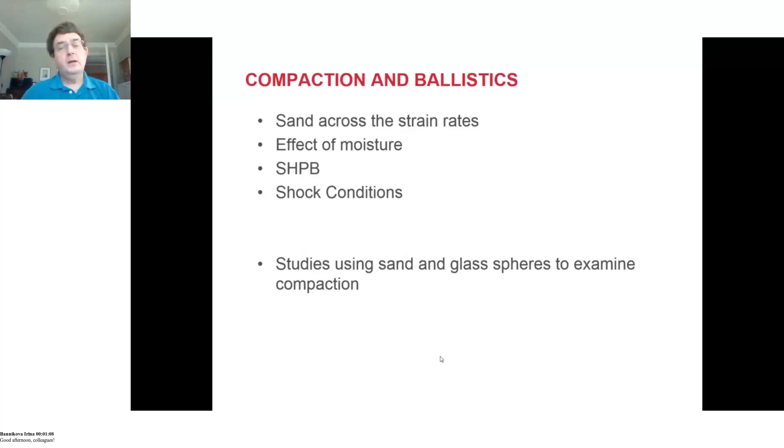So when we look at powders under shock loading, we'll discover there is quite a bit of literature out there. There are various porous models which give us a prediction of what's happening, but often that's when the volume, the voids, have been compacted to an extent that they no longer produce any difference between that and an effectively solid material.

So a lot of the densification processes are ignored, and here we see a graph on the right-hand side, showing an area with question marks in it, indicating some kind of densification occurs that we really don't know about. And then you've got different lines of prediction based upon the initial percentage volume of the solid. So these are kind of models. They've been around for a reasonably long time, and are reasonably well known.

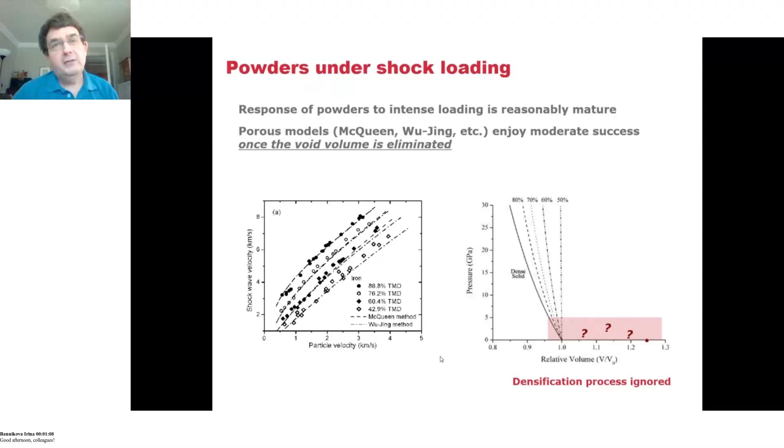Are they predictive? Up to an extent, but they're not really accurate to say a 5% level. If we look at densification at low stresses, we can think of a number of processes occurring. Here we have a little diagram showing on the left-hand side the grey particles, which are material that has not been subject to any stress.

Then when you put on a low stress, you have a kind of rearrangement of the particles. They move relative to one another. They turn - there's rotational energy in the system. Those particles move, rearrange themselves, and end up being slightly more compact. Then you get a region of localized flow where the material is being crushed and moving in, and all the voids are being eliminated - that's the brown region. And then the green region shows a region where fundamentally the material is compacted, and it's just bulk deformation from that point forward.

And those kind of four regions are generally what we would say happens in the granular material. However, what you get is that a lot of the models do not have any mention of what's happening in the microstructure of the material.

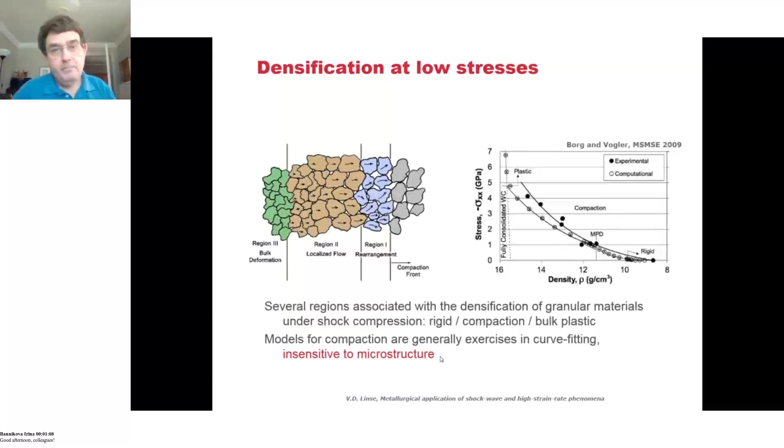You can do plate impact experiments, and this is some work that was presented at the Shock Compression of Condensed Matter meeting in 2011. Various channels were put on there with powders of different initial densities, and an impact was performed on the powders, measuring the particle velocity at the rear of the powder, and from that deriving a shock relationship.

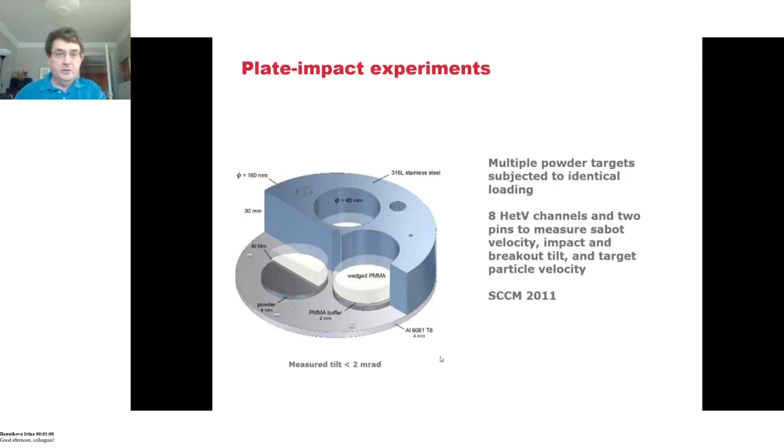One of the key things about a powder is there's significant energy dissipation. You get quite hot material being produced because you've got localized friction between the particles. You have jetting of material within the voids, and energy absorption due to that.

Here we see on the pressure density curve, a compaction process starting at the original density, going through a compaction region up to something close to a hot, fully dense material. Upon release, you follow an isentrope and go down, and there is a lot of residual compaction in the system. That area under the pressure density curve is a measure of the energy deposited into the system. Hence the system can get quite hot.

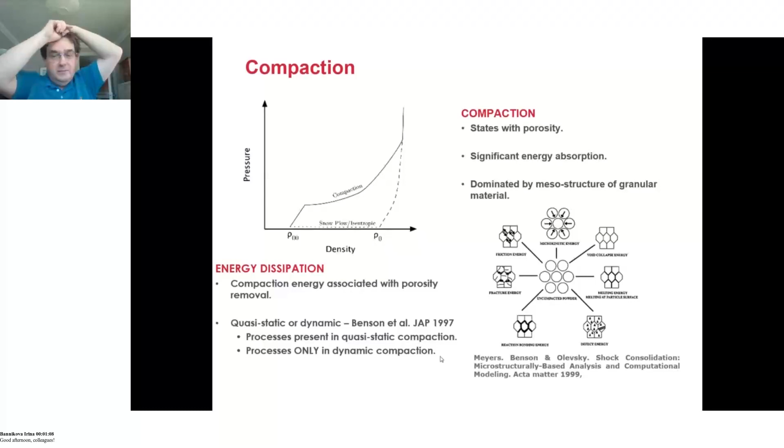Now if you took just sand, with an average particle size of around 150 to 210 microns, picked it up from a beach or similar, and put it into a container under a loading device at very low rates, you will get responses as shown on the left-hand side here.

There's a range of initial densities. That was something we did by just tapping the sand to compact it down under very low loading. So take the sand, tap it on the laboratory bench, then measure the density, and we could get a range of starting densities.

We loaded it quite gently in terms of pressure. There was no particle fracture involved, and we got compaction up to a region of around 1,650 to 1,700 kilograms per meter cubed. You can see the initial densities gradually move together. There's a fair degree of compaction occurring, but ultimately things follow fairly parallel lines, aiming towards some kind of mass density. So that was okay, that was mainly dry sand.

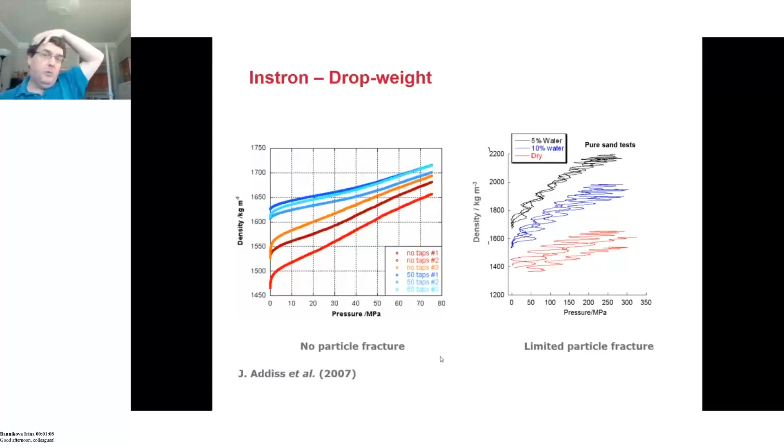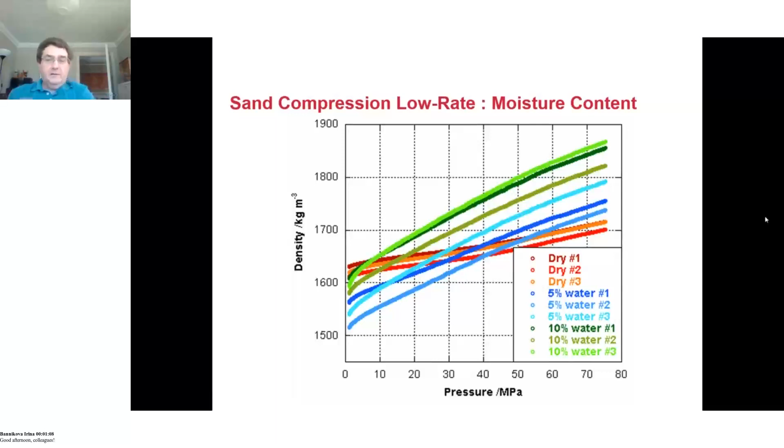Now if you revisited the data for low rates, adding the water, you can get this kind of response. Once you lubricate those crystals by having a little bit of water present, you can get a whole lot more compaction going on, as shown here, where the dry material is the red lines and fairly flat, whereas the moistened material shows significant density increase.

Okay, so far reasonably okay, but can we go to higher rates? Here we did some research funded through QinetiQ, a research organization in the UK, and we did split Hopkinson pressure bars on sand.

Now for sand, it's obviously a porous material. You cannot just put it between two Hopkinson bars because it will fall out of the way. So you put a jacket around the Hopkinson bar sample, around the rods, and you measure the strain in that jacket.

You need this jacket with a strain gauge on it, and you put the sample within that jacket, using a compaction pulse through the Hopkinson bar. You measure the component of stress along the bars, sigma x, using the strain gauges on the bars, and you measure the radial stress, sigma r, using a formula due to Timoshenko to relate the strain on the outside of the jacket compared to the strain on the inside.

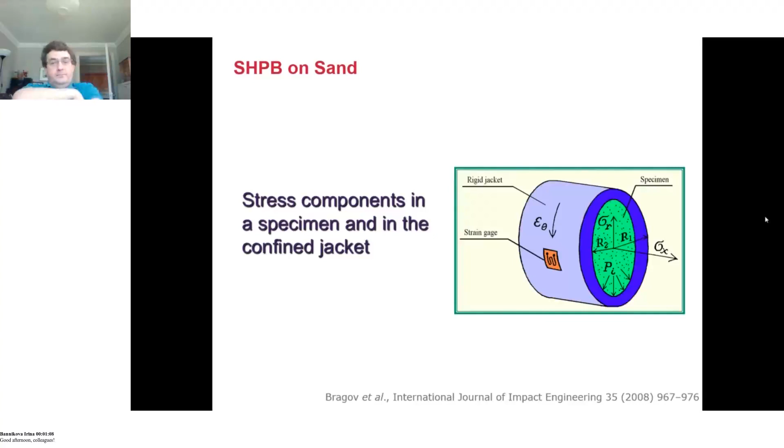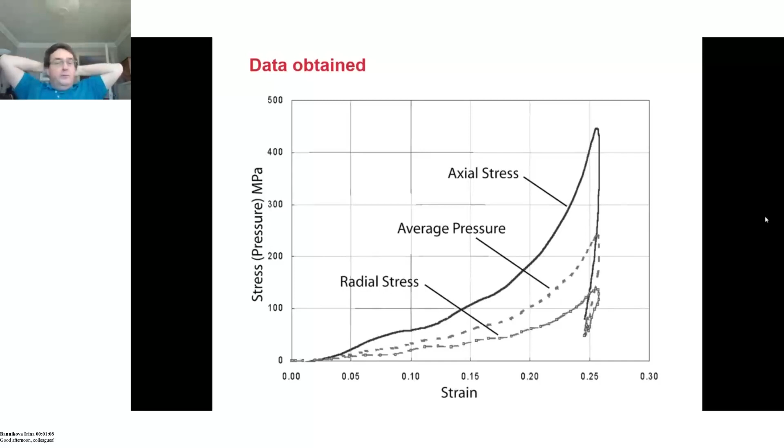This is the kind of data you can obtain from a Hopkinson pressure bar, showing the stress in megapascals. You can see the axial stress, or the stress along the rod, gets up to be quite high, around 500 megapascals. The radial stress follows a very similar behavior, but doesn't go as high, only to about 130 megapascals. If you ask what is the average pressure in the system, you would do a weighted average along the axial stress and the radial stress and come up with the average pressure. This is a response.

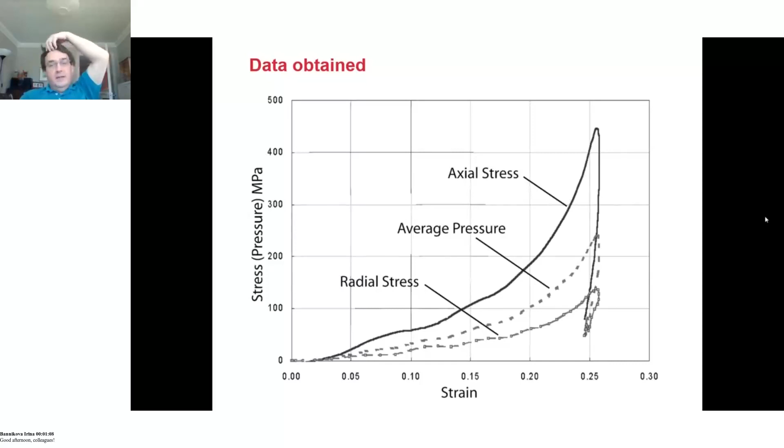You can repeat it with different degrees of water being added, with different particle sizes, etc., and get a series of responses. You can then take your sample arrangement for shock impact. Here we have a system where we have a copper holder with a 3 millimeter thick layer of sand in it, and we're striking it with a plate impactor coming in at up to several hundred meters per second.

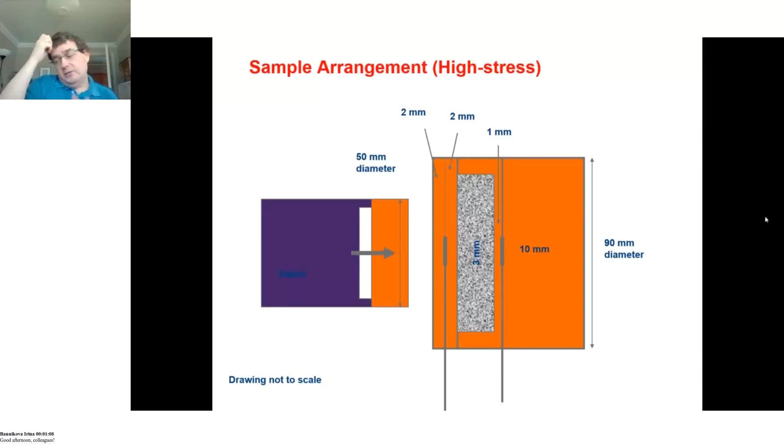It hits the front of the target, and we have manganin stress gauges, which I mentioned in tutorial 2, to record the stress in the direction of impact before the sand layer and after the sand layer. This is the output we got from the rear gauge.

On the front gauge, you measure the input pulse from the copper on copper impact. That's a generally square kind of pulse. You then have a reflection from the sand layer coming back to that gauge, and then you measure what goes through the system. Because we know the dimensions here and they are consistent from experiment to experiment, we can do a calculation based on time of impact - time of stress arriving at the front gauge, time of stress arriving at the rear gauge.

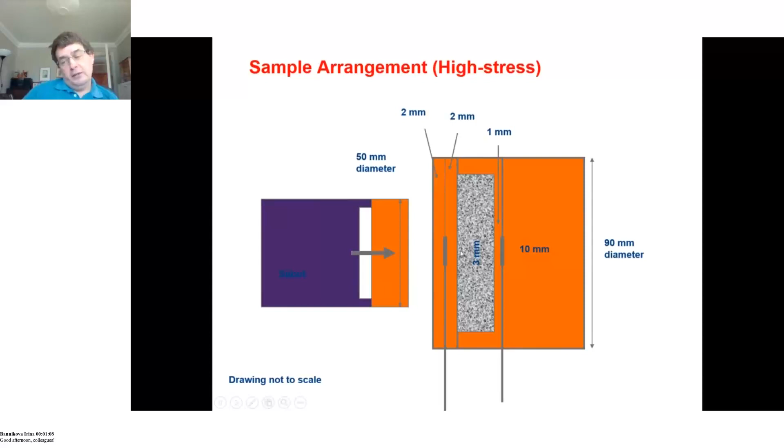This is what you get for different impact velocities, ranging from a couple hundred meters a second up to 900 meters per second, with of the order of 5 experiments. The main thing you'll notice is the time of arrival of that stress pulse varies quite strongly. It's systematic, but there is a very large change, going from around 4 microseconds to kind of 2.2 microseconds. So the transit time through that sand layer has reduced very much over that process.

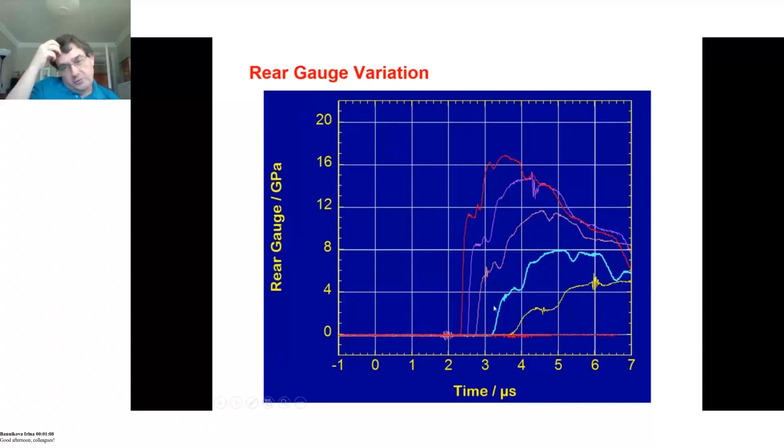The other thing you will notice is there is a step followed by a second ramp, and you will notice some evolution of smaller features on that ramp. I personally think this is due to the time taken for individual grains to fracture. However, there is no definitive conclusion on that.

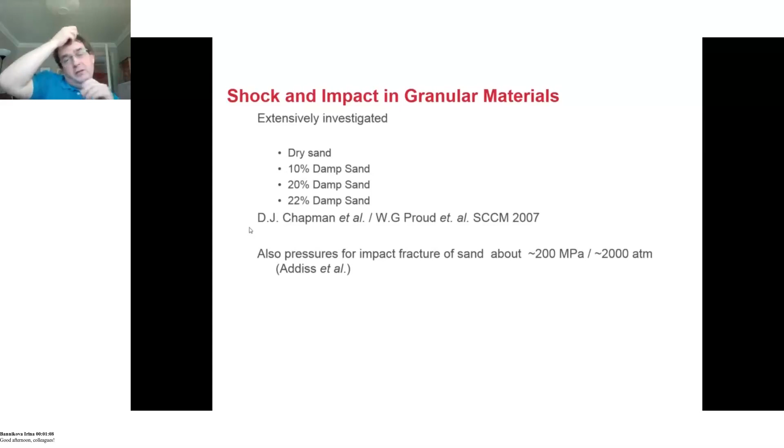Shock and impact in granular materials has been extensively investigated. We reported this at Shock Compression of Condensed Matter for a number of years. We also calculated the pressures for the fracture of sand - individual grains would fracture around about 200 megapascals. But please remember, a grain in the bed can actually rotate and translate as well as fracture, so there are a number of potential processes that can occur.

But then if you added just a little bit extra water, so 22% saturation instead of 20%, you could have a quite marked difference in the shock response. So what this is indicating is that initially, when you replace the voids with water, you have very little effect, but as you get towards filling the majority of the voids, very small variations at that point make a large difference in the shock response of the system.

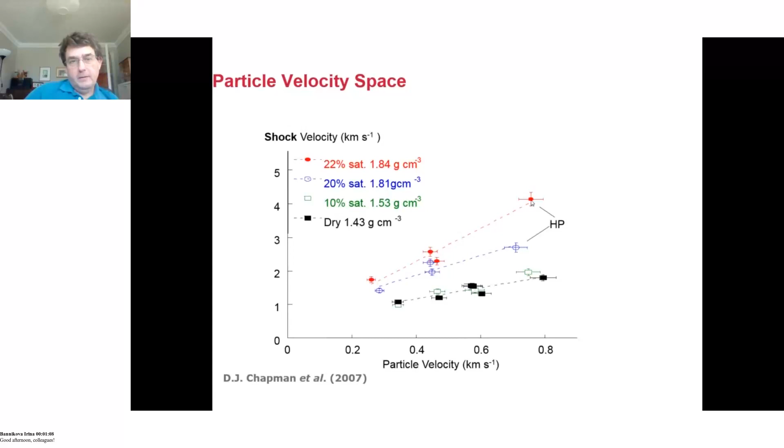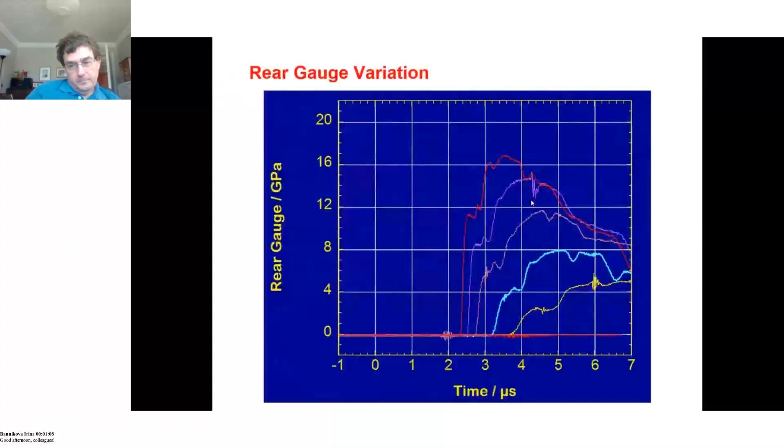Okay, now one calculation you can do is to think about what's happening on the grain size response compared to the global shock response. So what is the rise time of that first pulse through the system compared to the size of the particles? Under 200 meters a second, you can compare the 1 microsecond rise time against a shock speed of around 1 kilometer per second.

What this means is that rise time represents a size of 1 millimeter or 4 grain particles. At 500, you're now down to 0.7 of a millimeter, or approximately 3 grain particles. And at 800 meters a second, you've got 2 grain particles between being undisturbed and being fully compacted. This shows there's effectively a doubling of the compaction space in the system, so you've got a far more violent process occurring.

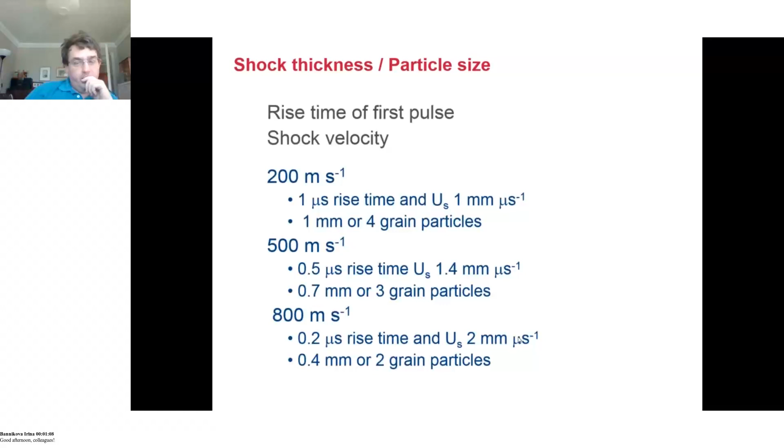If you take the shock pressure and combine it with results from the Quasi-static bar or the Hopkinson Pressure Bar, what we have here are the results from the Hopkinson Pressure Bar down here, and you have the response of the shock experiments at these points. So we were able to get a good overlap in stress in the system.

We compared that to the strain in the system, and again you could do the pressure calculations if you assumed that effectively the Poisson's ratio, or the lateral thrust of the system, was maintained at the same level of relationship as was seen in the Hopkinson bar. You find that there is a curve to which the sand sits, and it's one continuous curve, so you'll see continual behavior. There's no sudden change in the dynamic regime, it's all fitting onto one curve.

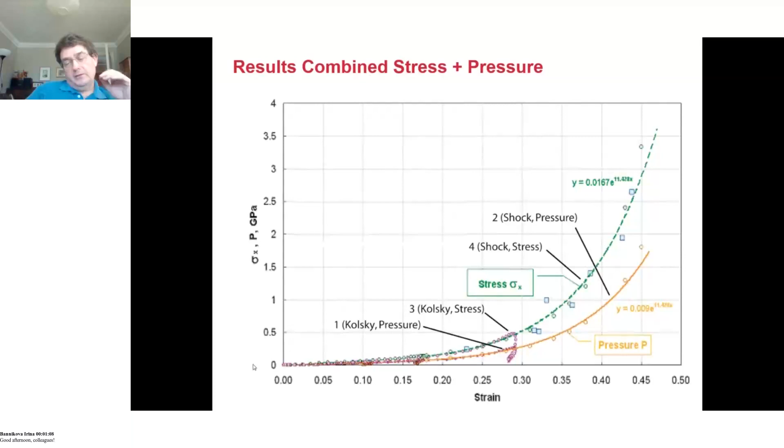Having identified that one of the main differences is in the initial compaction, we decided to follow this up by doing some studies involving sand, but also spheres. What we have in this example is showing spheres of different sizes that we purchased. These are glass spheres, and you can see them in the green region, the blue region, the orange region, giving an idea of the particle size distribution.

You'll also see behind these much larger, longer areas, and these are due to the sand. So we have a reasonable amount there. You've got these polydispersed systems, and you've got these mono systems. So we used this particular type of analysis to get it.

And here we have an example of scanning electron microscopy of the glass spheres, one of the particular batches, and also of the sand, so you can have a comparison of what they look like.

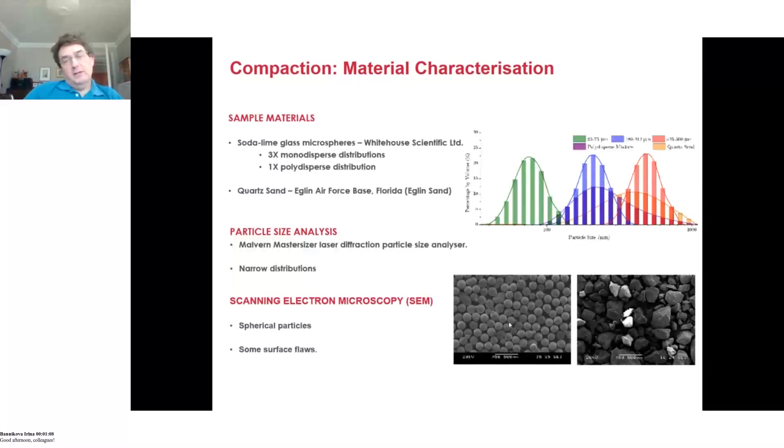Now we started initially doing some quasi-static compaction experiments, and there are a number of ways of doing this. But what we particularly did was mount a system where we could measure the force applied along the direction of loading to the sand, but also, by having a collar with an instrumented load cell down below, we could measure the force that was being transmitted to the outer side of the loading chamber.

Effectively we're removing the effects of wall friction from the system, or reducing them very significantly. We can also know about the mechanical properties of this jacket, and again we can measure the strain on that jacket as well. So we can get a good measure of the components of loading of the system, we can measure compaction, and we can also include lateral expansion and lateral friction.

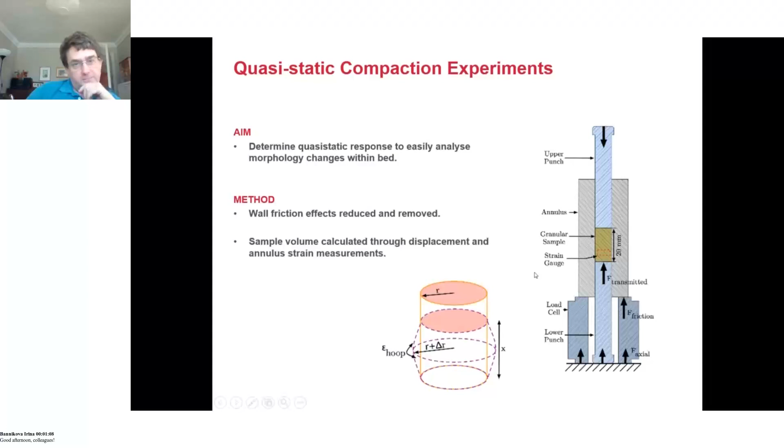What you do find doing these kind of experiments is that up to 40% of the load that you're applying does not particularly go into the sand. A good 40% of that load will actually go into the walls of the container, so this makes a significant difference to the analysis of the results.

So you can do a series of experiments using different particle sizes, and here is sand. Here is all the data put onto the same kind of curves, and so basically you see increasing strength with decreasing particle size in terms of the particles present. That's not a big surprise, you find that kind of analysis in many of the textbooks, because critical flaw size, the number of flaws in these particles, etc., changes with dimension.

You can have a particle that is so small it cannot break, because using the Griffith's criteria, you find that you cannot get enough energy back to support that crack.

Microspheres showed increasing strength with decreasing size. More energy was absorbed in the compaction with smaller particles. Sand, basically, there was no real transition seen in the sand samples—it just started compacting from the beginning. There was no trend in stress required to achieve full compaction in the systems, but porosity was present in all of these samples.

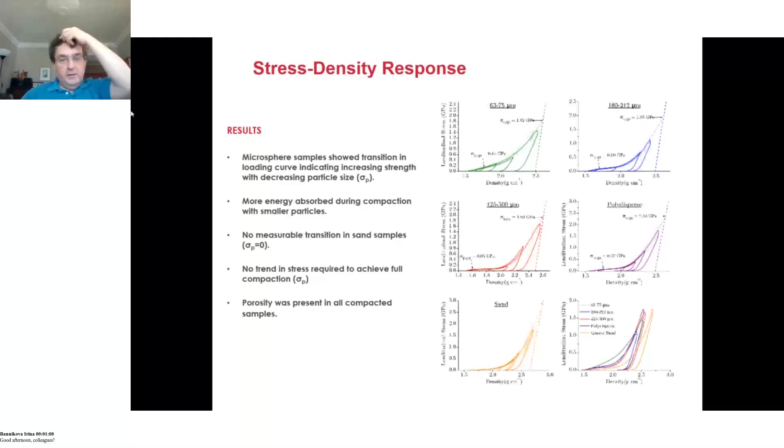So you can do the work on the spheres and find that yes, you have to reach a critical level to get the spheres to compact, and they're stronger as they're smaller. With sand, you start getting compaction at very low stresses, and it kind of goes.

We recovered the samples and discovered, and here you can see a line amongst these pictures, this sigma p. This is the stress at which we saw fracture in the spheres, and we're always getting fracture in sand here, so that's why I've got this dotted line. But you can see very clearly there is a kind of stress at which the spheres fracture quite strongly, at a certain level.

So smaller grain size particles are stronger in terms of their initial mechanical response. However, because we're dealing with the same material, they will ultimately fracture, and in this range of conditions, they started fracturing at the same level.

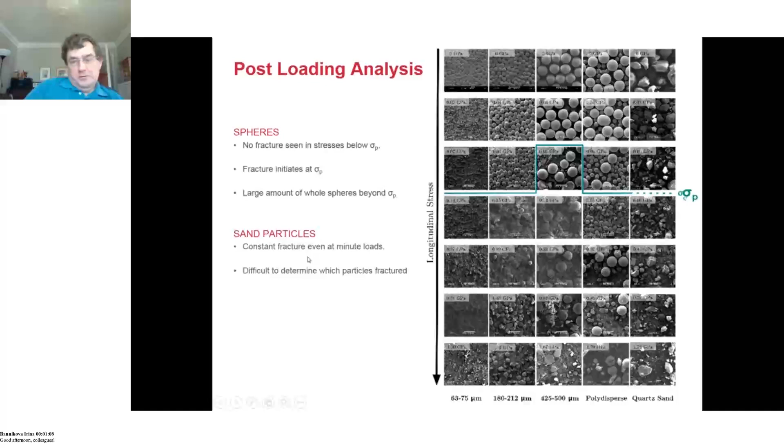So how does that play? From this, we get the idea that with the glass spheres, we have a range of compaction behaviors, and we also know when particle fragmentation becomes important.

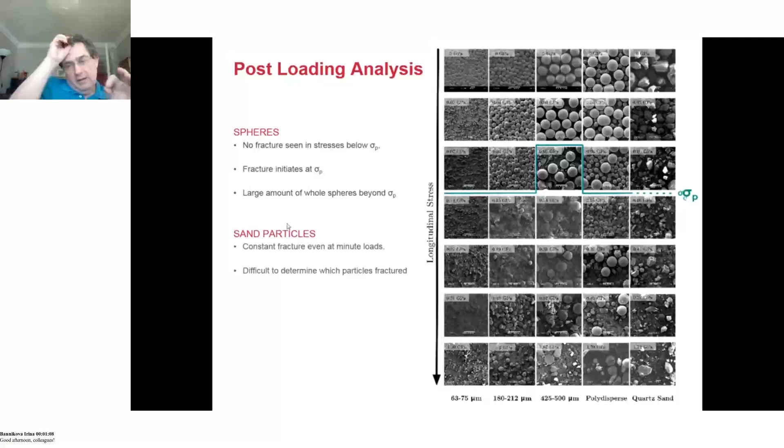So there are different ways these particles fracture. There's rubbing of particles against one another, which causes a small amount of dust to be produced. There is removal of larger amounts of material from the outside of the particle. And then finally, there is just particles breaking into fairly large chunks. So you can find there is a fracture strain rate dependence on the amount of each of these you see.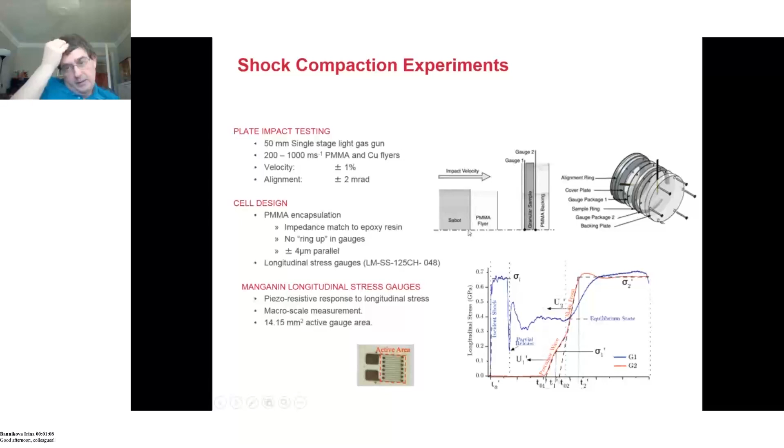And here we have a kind of typical response to the system. Here is the front gauge, the loading pulse you see. You'll see some partial release due to reflection of the shock wave from the layer of granular material. And on the rear, you'll see a compaction wave, a precursor wave, followed by the main front. So you'll see this initial step function here.

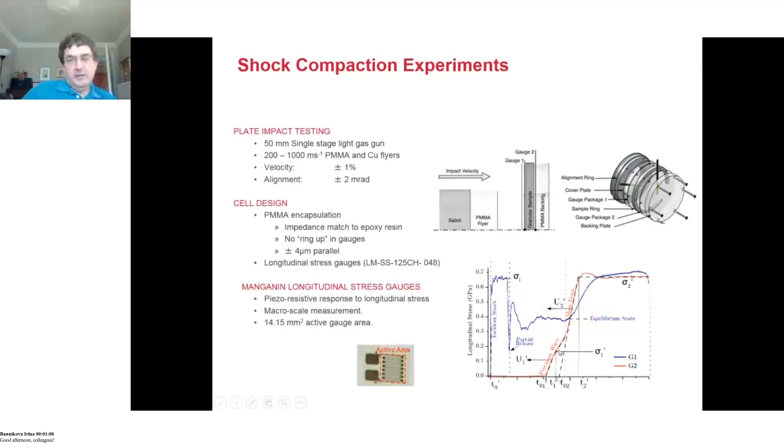So we could follow this with particle size and grain size, and this is what we found. If you start with the pulses, you've got a 0.37 GPa pulse. You'll see again the surrounding behavior, a second step, and it will gradually straighten up to become a very thick, very rapid rise in the stress regime.

So you can see at what stresses the compaction behavior becomes less important, and fragmentation and fracturing of the grains becomes a significant process.

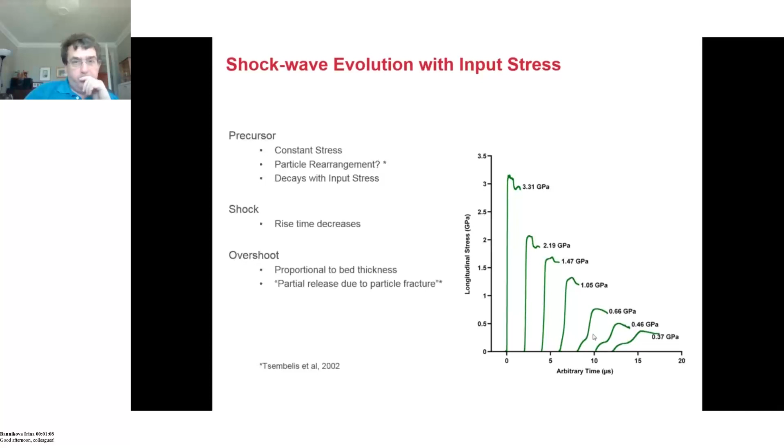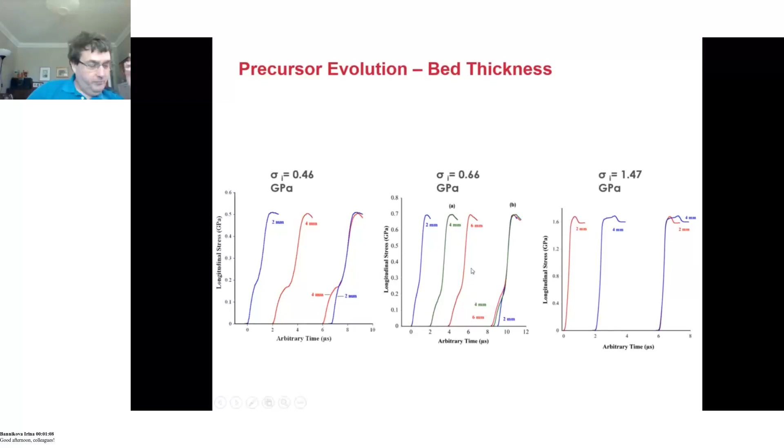Now, as you change the bed thickness, you can find how the compaction wave, this initial precursor wave, goes ahead of the material, and you can find its velocity. So here we have, at this particular stress, a couple of stress pulses for different thicknesses of bed, and this is compared. Again, at different stress, different bed thicknesses, again showing them compared, and then at a different stress, again, very little change above 1.5 gigapascals. So this compaction behavior is in the region of 0 to 1.5 GPa.

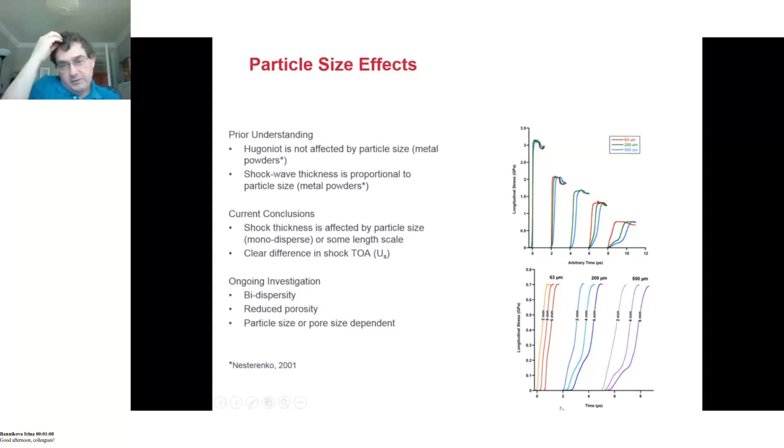If you say, well, what about the effect of particle size? What we see here is the comparison of different particle sizes, and you can see the general change amongst the class of materials. At 63 microns, not very much changes. At 200 microns, a very marked change. At 500 microns, a really clear change in the setup of the system.

So that's important—up here, you'll see these various classes of material compared, and you'll see how they generally collapse onto one type of curve. This is something we're still interested in looking at. Can we look, bi-disperse material, at systems with more reduced porosity to start with, to see if it's particle size or pore size dependent? What is the controlling factor here?

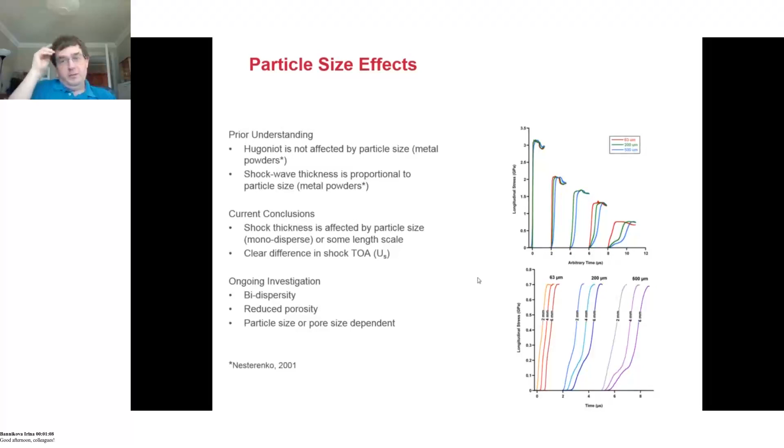This is again more detail on the shock response of those systems, extending that graph so you can actually see the raw data as it emerges from the system.

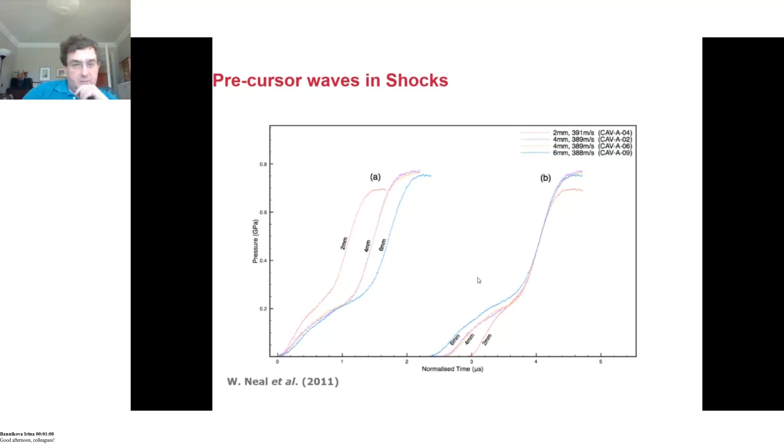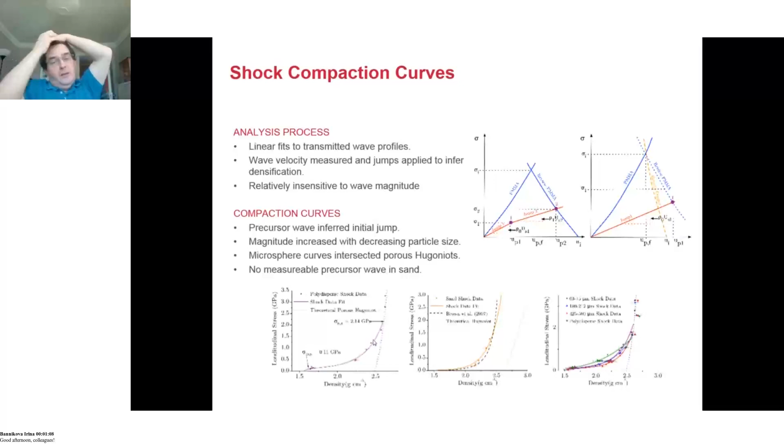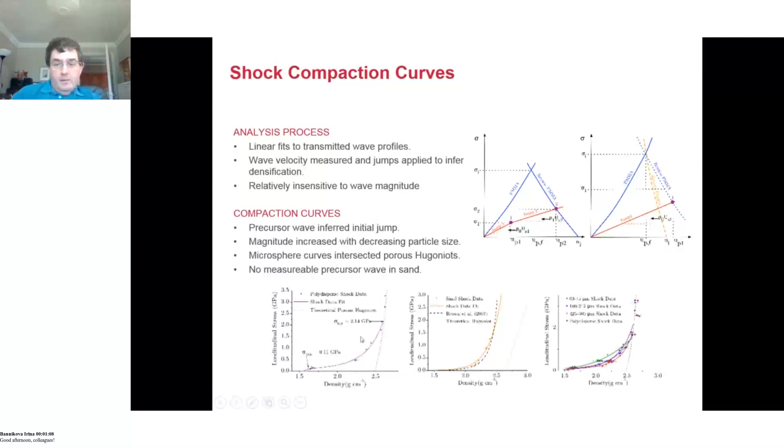Again, we find that the precursor wave has been inferred by the initial jump. The magnitude of that wave increased with decreasing particle size. Microsphere curves intersected the porous Hugoniot calculated for the fully dense material, and we found no measurable precursor wave in sand. So basically, we could compare pilot data onto a comparison with the fully dense material. For the spheres, you can see that you get quite a good level of agreement between the low-level compactions and the dynamic compaction heading towards this dense response.

So glass spheres, because of their nice shape, because of their consistent packing, etc., show really consistent behavior. The sand really doesn't fit into these simple models at all. You hit the sand hard, you will get a response which is stronger than what you see if you deform it gently and slowly. Again, I think it's to do with the range of particle fracture times in the system.

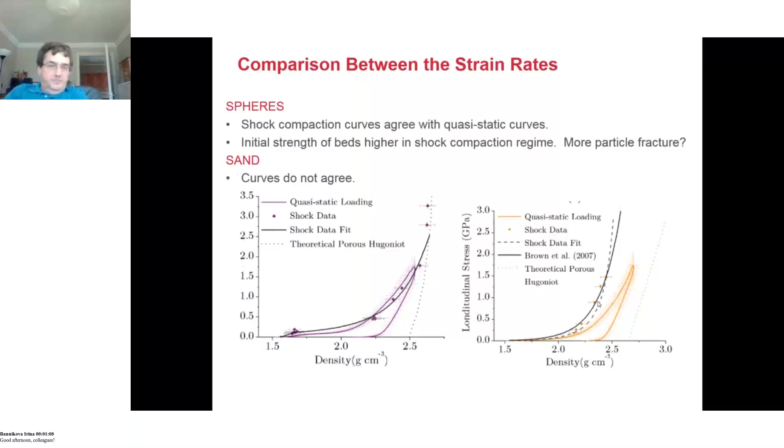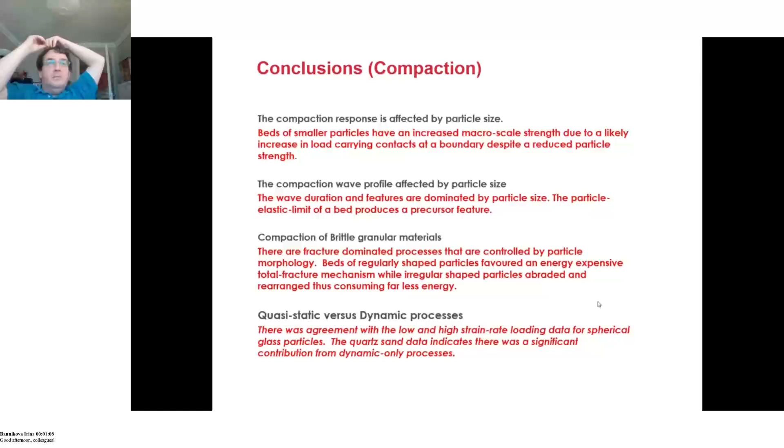So beds of nice regularly shaped particles, you need a lot of energy to get fracture to occur, and it all tends to occur at the same time. Whereas if you've got irregular beds, you can get some localized fracture occurring in individual grains, and so you've got a more gradual change in the process.

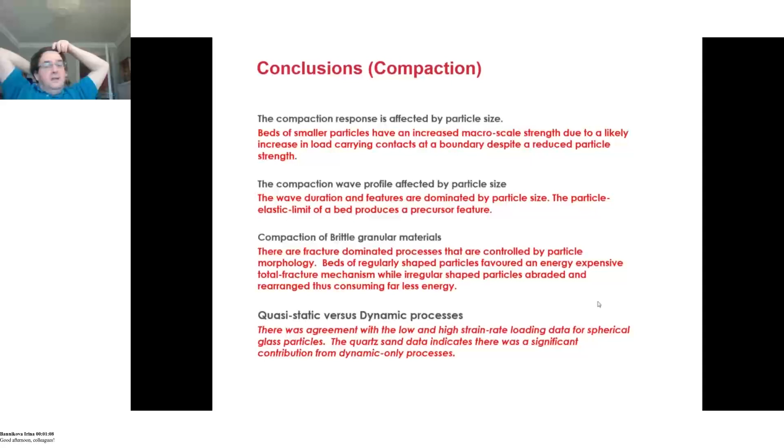So there is agreement between low and high strain rate loading for spherical glass particles. But when you get onto irregularly shaped sand with all its flaws and particle sizes, no, there are dynamic-only processes that appear to be occurring. So what we have is a fairly complex situation where particle size, flaw density, particle shape, and packing are all quite significant. And if you want to add some water in there, you will get some extra response as well. So that is why granular materials are quite extensively studied and also quite difficult to come up with a consistent theory for polydispersed granular particles. If you can keep the granular particles about the same size, life is generally more straightforward.

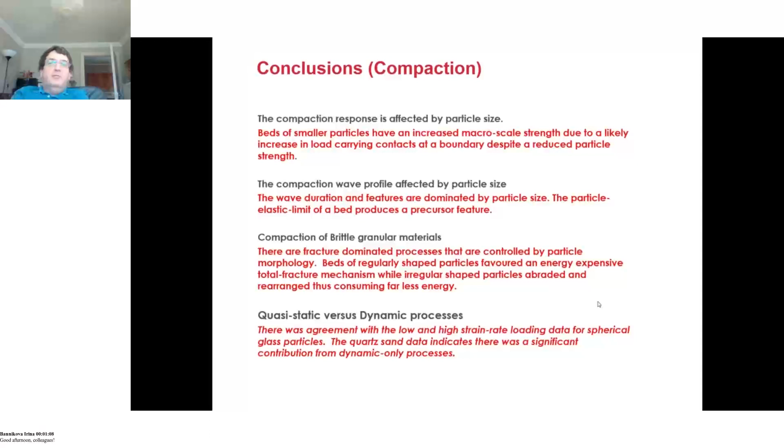Okay, now the last thing I just want to mention here is one of the things I was doing at one point was looking at very low density silica dust. This is silica dust, which is round about 5% of the theoretical maximum density. So it's extremely porous. This is like glass spheres, basically empty glass spheres is the best way to describe them. Very dusty, very low particle size.

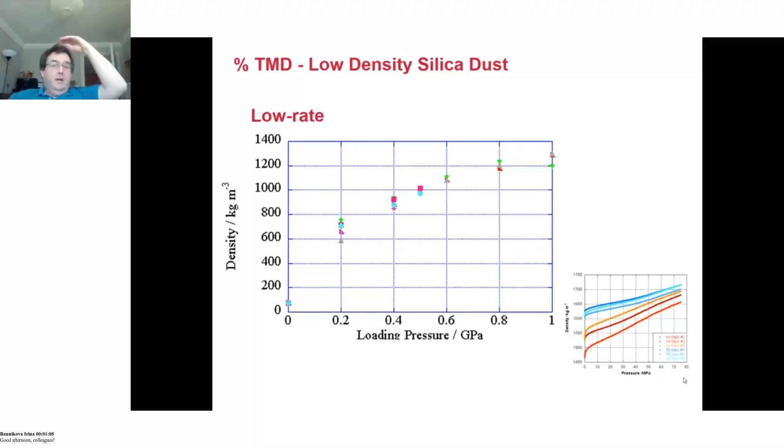So in fact, it's not showing a detached shock wave. What it's showing is that the particle velocity and the stress, or the shock velocity if you want to call it that, are basically the same. So I'm not measuring a shock, I'm measuring a compaction wave. This response is basically just compaction, even though the particle velocities are very high.

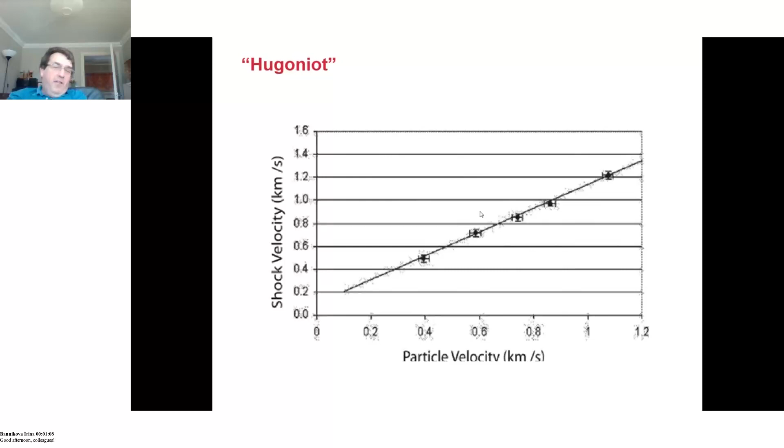That just shows a simple line of what I'm doing—shock velocity versus particle velocity, 1-to-1. There is a small offset, and I would argue there is a small amount of heating occurring in the system. So there is a small amount of energy being placed into that compaction wave, and that's causing a mild increase in stress compared to pure isothermal compaction.

But again, the differences we're talking about here are fairly small on the grand scheme of things. So if you go to really low density porous materials, you may find they cannot support a shock wave, even if you're going at 1 kilometer per second particle velocity. So that's again a quite interesting change in behavior.

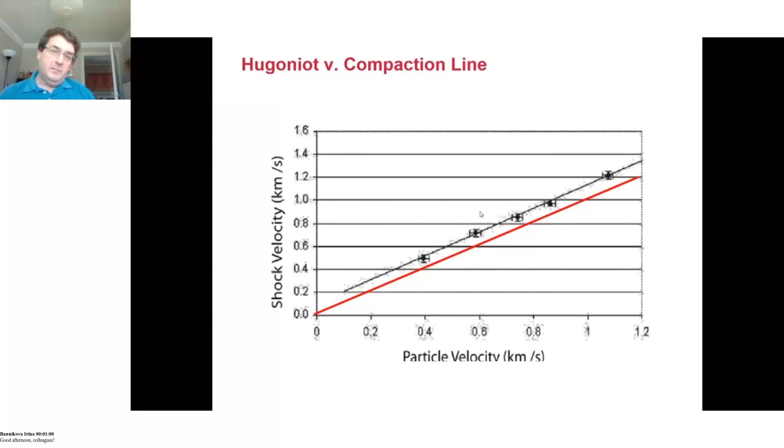So here we have the kind of challenges on granular materials: the need to define the starting conditions. What is the defining characteristic? We can do some physical understanding, we can go with approximate behavior, we can look at natural materials versus constructed materials.

What is the required output? Are we going for an engineering solution where we need something that works—that's important. Are we going for a science solution where we want to understand all the processes occurring—that's important as well. What is the thing that's driving us?

There are many ways of doing this, but it would be really good if we could define something simple about particle size distribution, or morphology, or the number of contact points a particle has, in order to get a list of key parameters that we can understand.

Compared to other talks, the talk I've given today has a lot of fairly big unanswered questions, because that is the state of our understanding. There's always research going on, advances are being made, but if you asked, is there at this moment a grand theory where we can define things and make a good prediction?

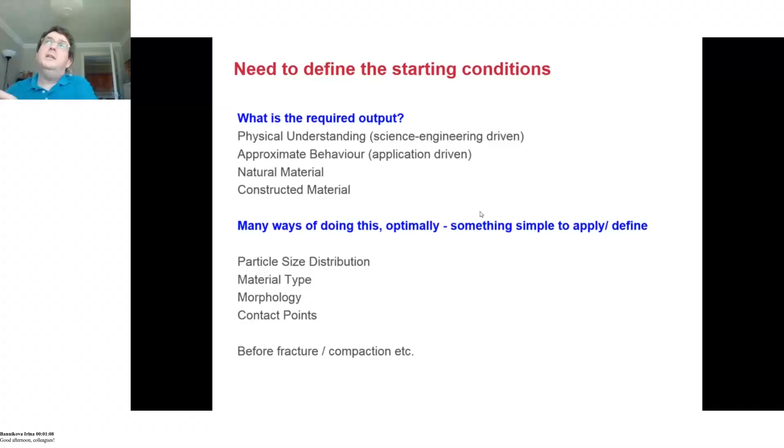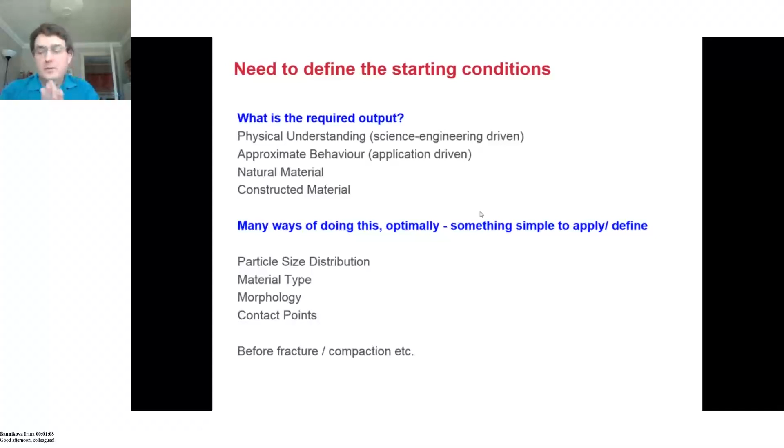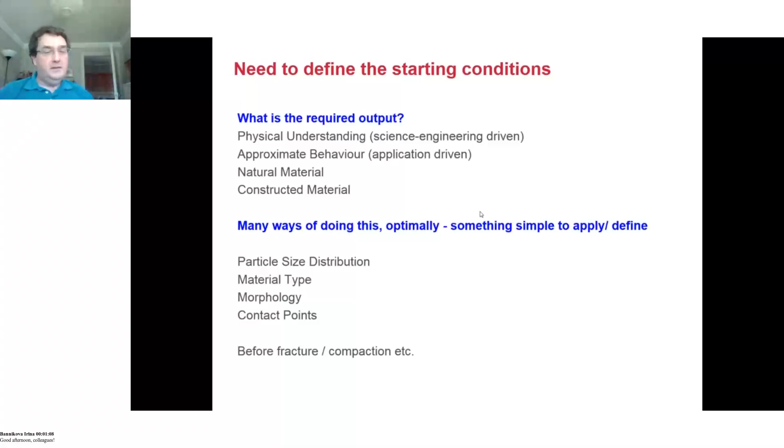I'll say there are some good engineering models, and we can come up with approximate solutions. But in the area dominated by compaction, there is no single law that's available. Now, Oleg mentioned in the first tutorial the Swegle-Grady relationship, where strain rate to the power 4 is linked to stress. For granular materials, that power law is about 2.5—so strain rate to the 2.5 is proportional to the stress in the system. So that's a key thing.

So that is the end of this particular presentation, and thank you.

Okay, right, because I wanted to present this mainly because, as I said, I wanted to make sure that I answered the question from the last lecture in what I hope is a reasonably good way. So again, it's another PowerPoint presentation. What a surprise!

But the question that was asked was - I was doing digital image correlation upon a disk of material in the Hopkinson bar. The question was, well, you've got these flow lines, and you've spent some time talking about the effects of porosity, the effects of particle size in these polymer bonded systems. I thought that required a little bit more of an explanation. So this is work that myself and David Williamson presented in 2009.

So for me, it was yesterday, but to everybody else, it was 12 years ago.

So the Brazilian test, tensile failure through compression in a predictable location. There are the anvils, and there's the load being applied and the lateral motion of the anvils. And you get tensile failure in the center there. And these are the controlling relationships.

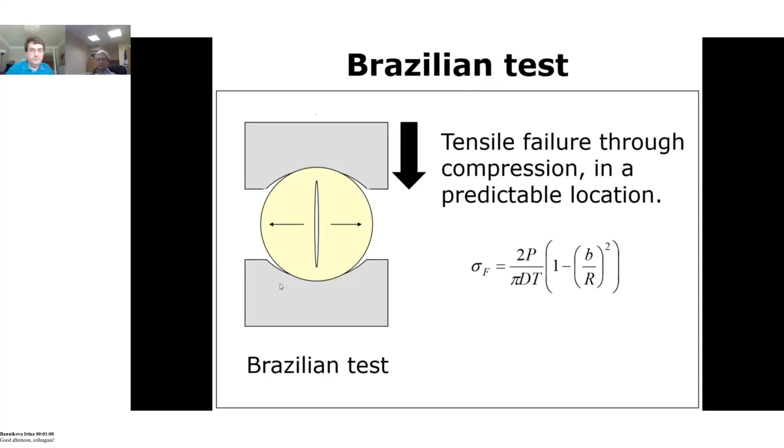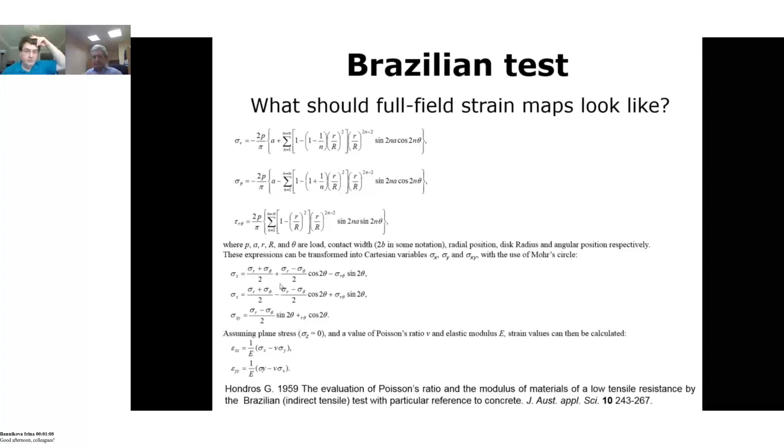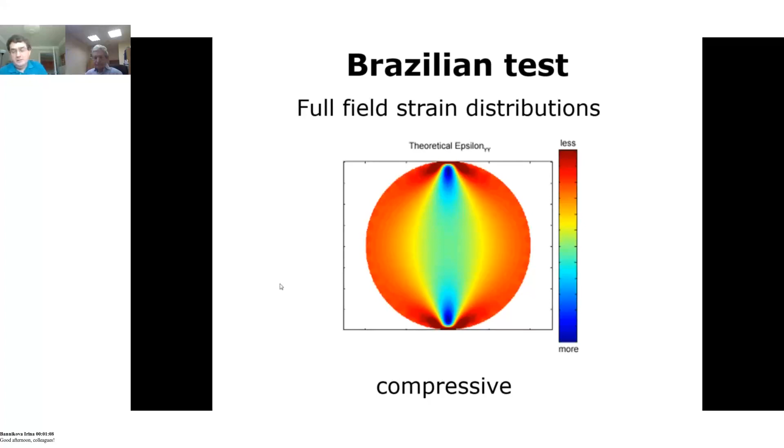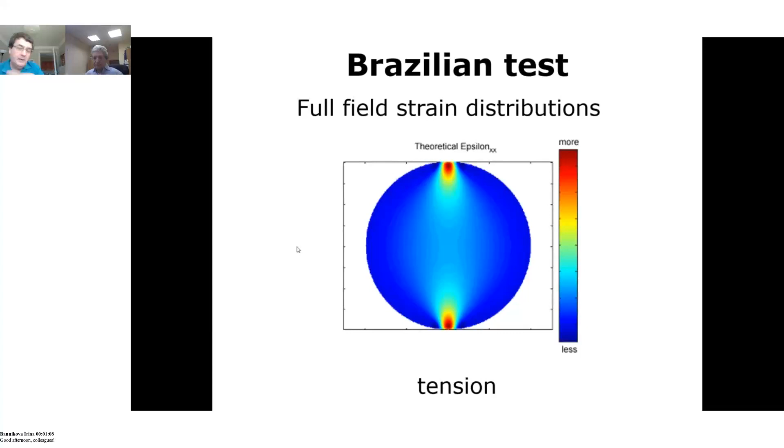If you do that, you can get the strain distributions in terms of the compressive strain in the system, in terms of the tensile components in the system. And here we can see the region in the middle, and then you can get the shear distributions in the system, and you can have that kind of response. So this assumes a fully homogeneous system, and these are the kind of strains we expect to see.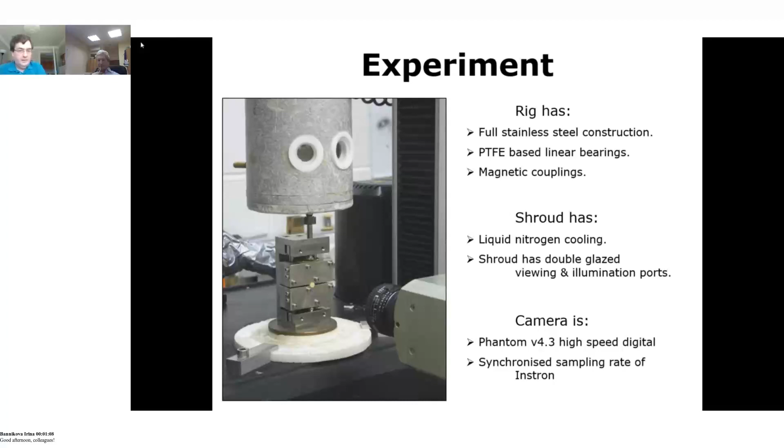So this is the results at room temperature. Basically, what we have on the left-hand side here is the initial sample, and there was progressive failure at around 107 newtons applied force in the system. So that was the results at room temperature.

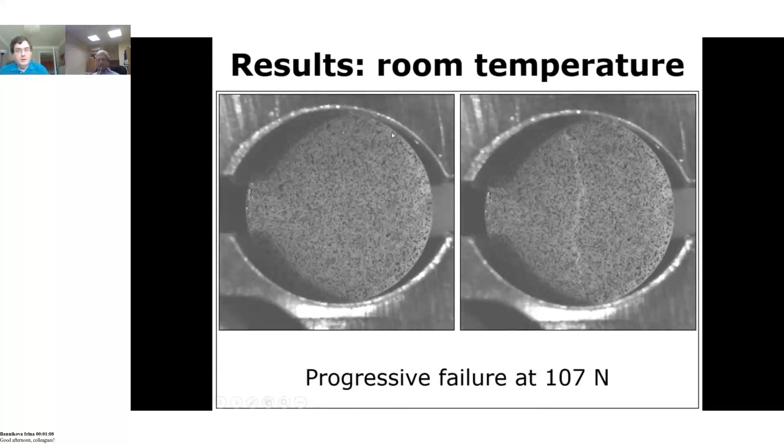When we looked at -94, this is the sample there, and you can see some cracks which appeared suddenly, so catastrophically, at 589 newtons.

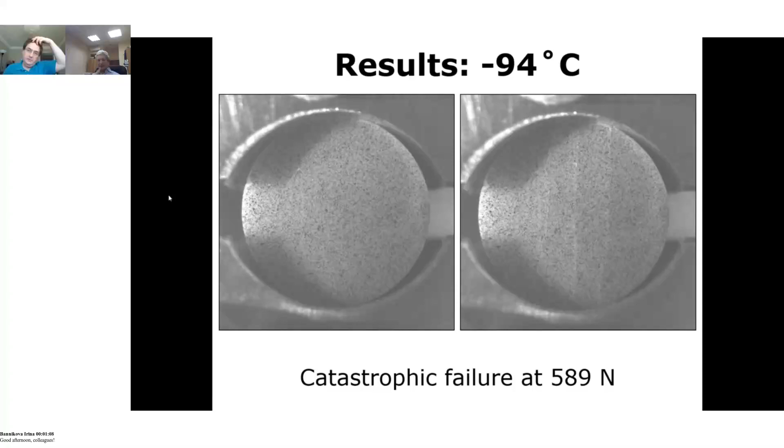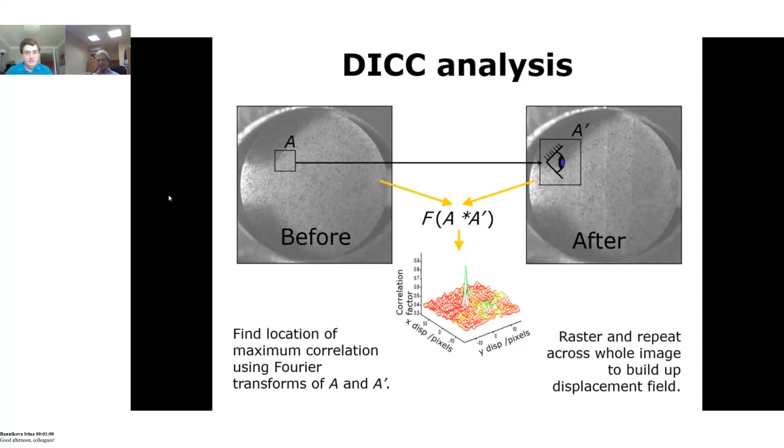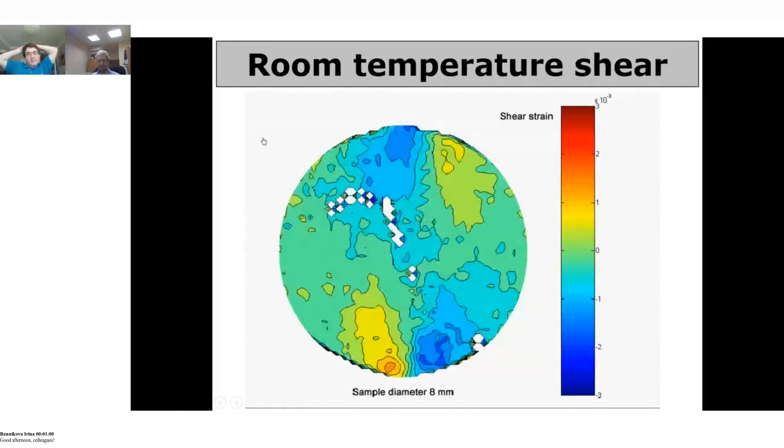This is the shear in the system, and we can see the lobes there. So play that again. Now you can see that this is not as nice, not as perfect as the calculation, and I fully agree. The question here was how close was it to the system.

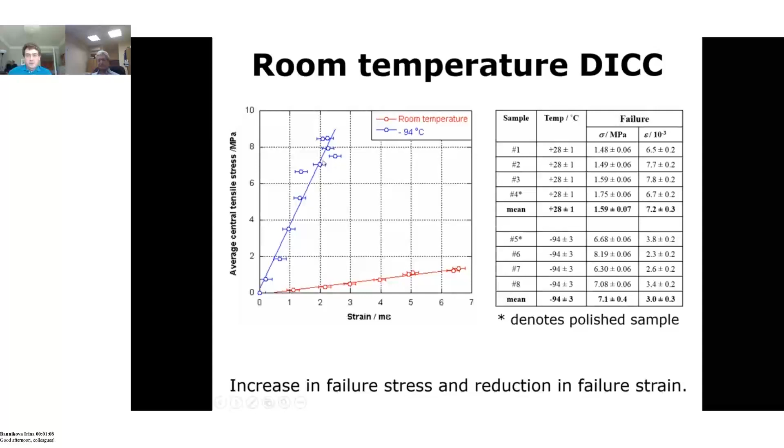So here we have the room temperature response of that material versus the -94 response. You see below that glass transition temperature, you can see the increased strength in the system, the catastrophic failure. And when you look at the failure in the system, this granular composite, when you look in detail...

Now, one of the things that we think will be interesting to follow up on this system, but we did not do it at the time, was to look at those deformation maps and see how much they varied statistically from the perfect homogeneous material and how that changed with temperature. That would be an interesting study, because it would show the effect of the microstructure and the microstructural failure process, this versus that, on a much more global scale in the response of the system.

So this is why we use in our studies a kind of homogeneous style of model, using temperature-time superposition for the polymer bonded systems in the region where the system's undergoing bulk deformation, bulk motion, and we can get a very good agreement across strain rates. However, when damage starts occurring...

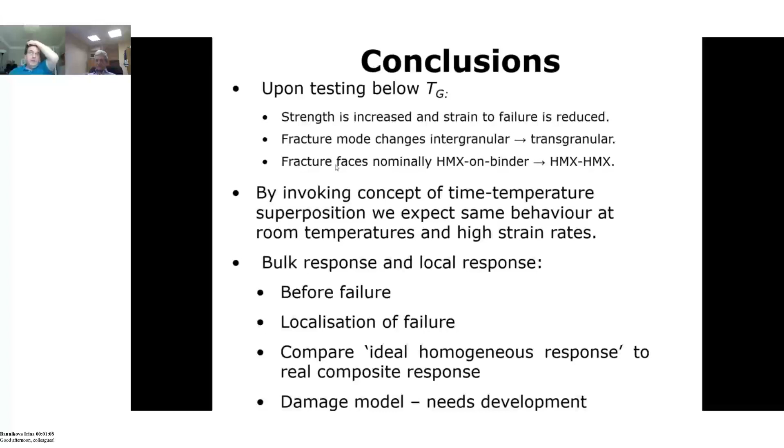We do get that very local response, that localization of failure. So we're comparing that ideal homogeneous response to a real composite material, but when damage occurs, that's where we really need the development. The other thing, of course—I'll stop sharing the screen here—is the fact that when we get that localization, we do get that very strong microstructural effect, and we need to understand that in greater depth. Okay, so that's what I want to say.

Obviously, implied there were differences at the mesoscale level, yet we still use a homogeneous style approach to it. This is kind of showing when we transition between the two. But again, looking at the effects of particle size in these composite systems and with temperature, and looking at how much the variation is between a homogeneous material and our real material with temperature, I think that will be an interesting thing. It might even show something linked to the damage process. But okay, there you go. That's kind of it, okay.

Any particular additional information? I'm happy to take questions.